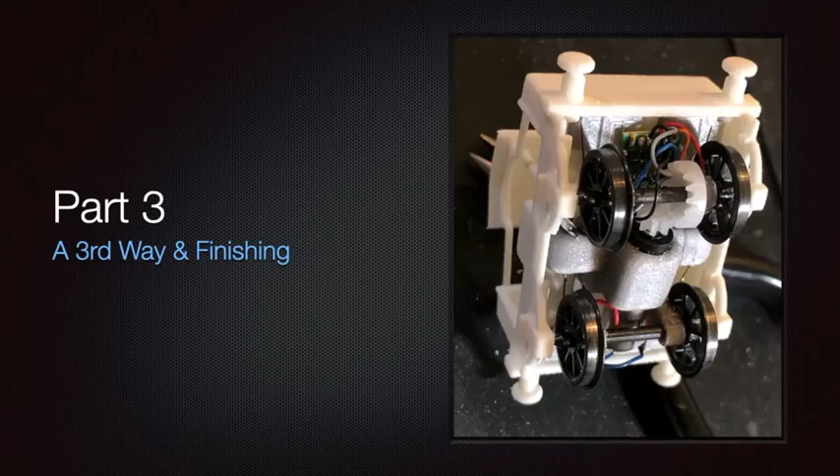Hello and welcome back to part 3 of this video series on 3D printing. In this part we'll be completing our model.

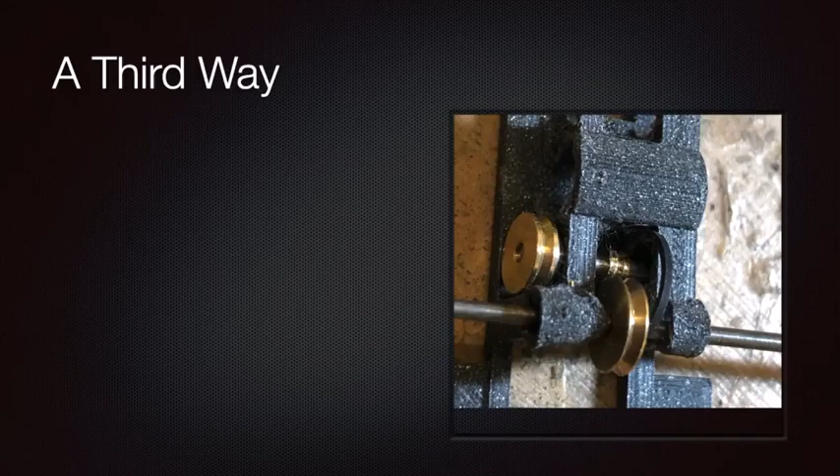I had printed the design that we've talked about in earlier parts and was starting to assemble the final product, as you can see in the illustration on the right. However, I soon realised that I had not allowed enough space around the pulleys, both for fitting the drive belts and also for allowing for the thickness of the pulleys.

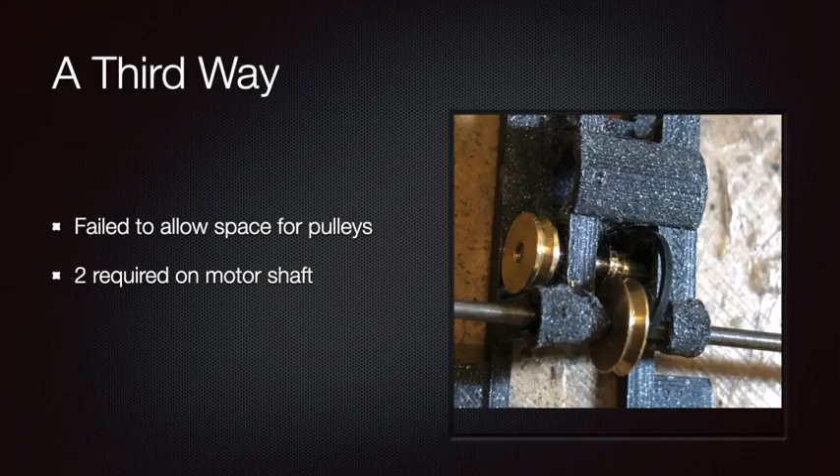The other problem I had was that the motor required 2 pulleys on the end shaft, one for each direction, and the belts had to leave these pulleys perpendicular to the shaft, otherwise they wouldn't stay on the pulleys correctly. Therefore I had to move the motor outwards in order to fit both in between the back-to-backs of the wheels on the Simplex.

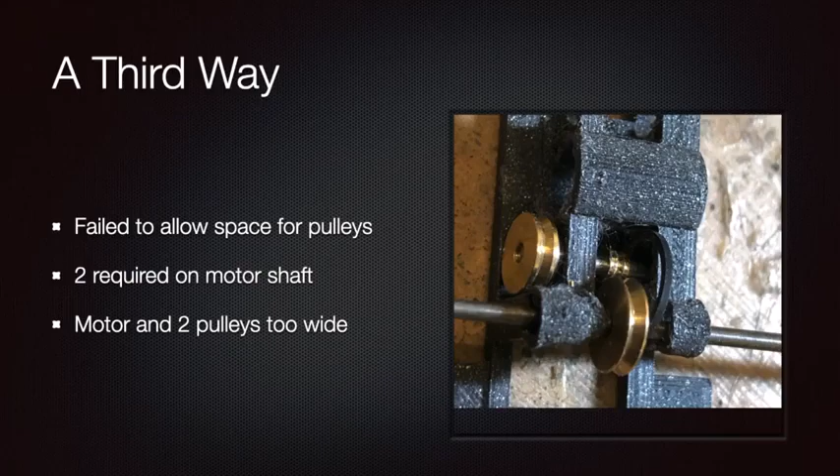This made it too wide and the motor would protrude through the wheels, and this wasn't something I wanted. It would be too visible. Therefore I decided I would look for another way of motorizing the Simplex.

So this new approach I used took advantage of a small motor that I already had, another 6mm diameter motor, only this time it has a planetary gearbox attached to it, which gives quite a high reduction ratio.

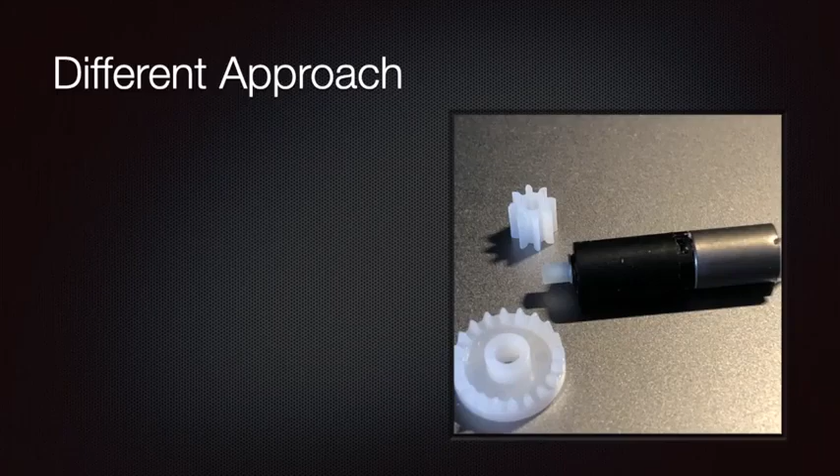I also found a spur gear and a crown gear which would mesh together, the spur gear fitting nicely on the end of the motor, and the crown gear fitting on the 2mm axle of the wheel set of the Simplex.

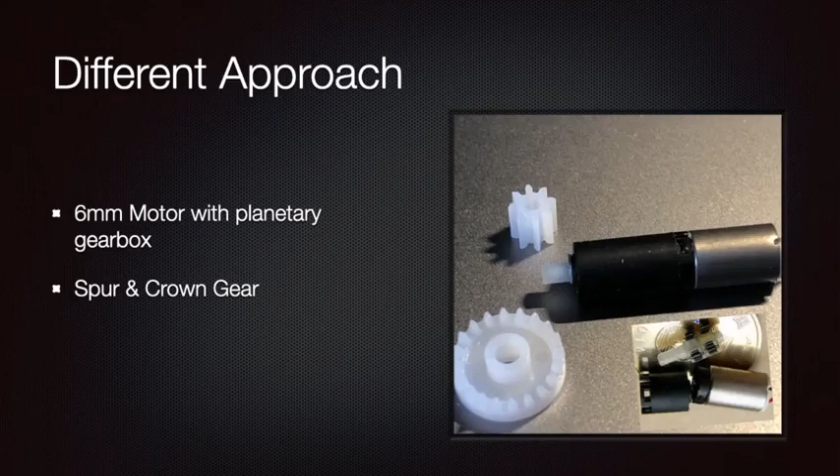I decided I would therefore try and make a design based on using this motor instead of using the pulleys. It did have one disadvantage in that it would give me 2-wheel drive. This motor is quite long and there wasn't enough space to fit 2 of them underneath the chassis of the Simplex.

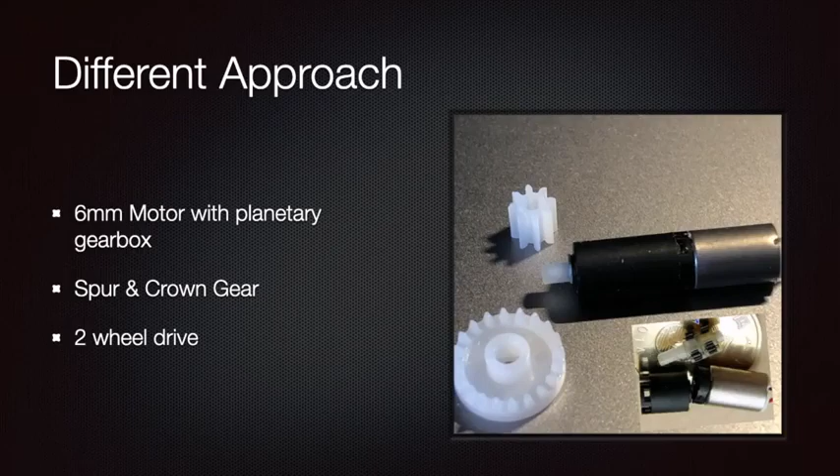So I went back to the drawing board. Well, actually no, I didn't go completely back to the drawing board.

What I did was I took my existing design, the one that was using pulleys, and I used the feature of Fusion that allows you to remove material from a design to get rid of that portion I no longer needed. So what I did was draw a rectangle around the center section, which previously held the motor mount and the 2 mounts for the bearings that were used by the intermediate axles.

Finished that sketch and then extruded it straight through with a cut operation to remove that material, and I was left with the basic frame, so the base and the uprights that would be supporting the axles.

Of course, when it's turned the right way up, the base would be the top and the uprights would be the supports going downwards where the axles get mounted.

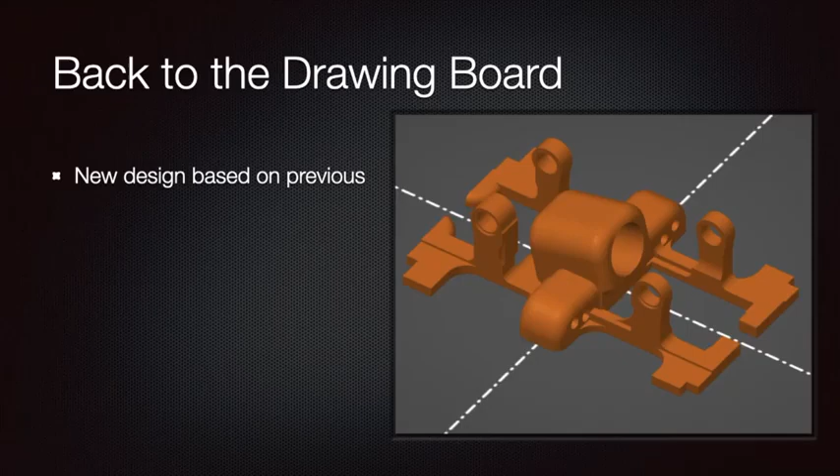What I needed to do was to create an angled mount for the motor. Now, the reason for this was the motor was too long to fit between the axles, therefore it had to be angled so that it went underneath the non-driven axle, but would still mesh correctly with the driven axle.

It's very important with these gears that the motor shaft is perpendicular to the axle it's driving, and that if you take a line through the center of the motor, it passes through the center of the axle. That way the crown gear and the spur gear will correctly mesh. So this was a crucial dimension and angle required in this design.

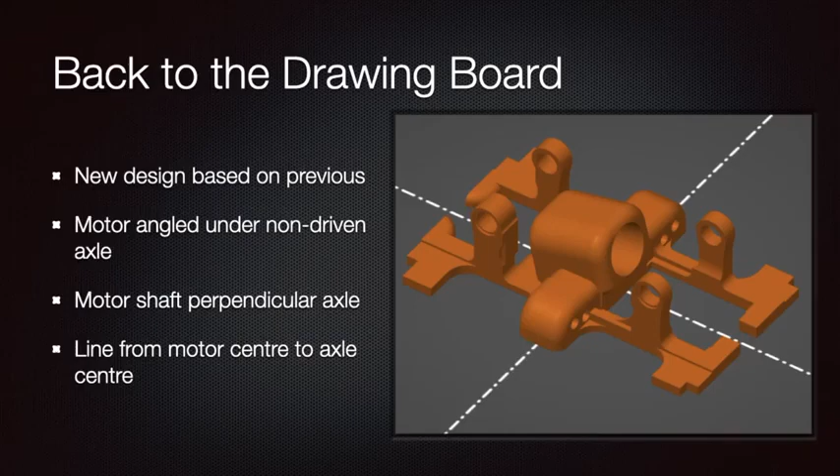So the question was, how was I going to get this right? The motor alignment was actually not that difficult to do in the end, but took advantage of the features of Fusion. I'm going to briefly show you how I did this by using the facility of Fusion to go back along its timeline and show the steps that were done to create the design.

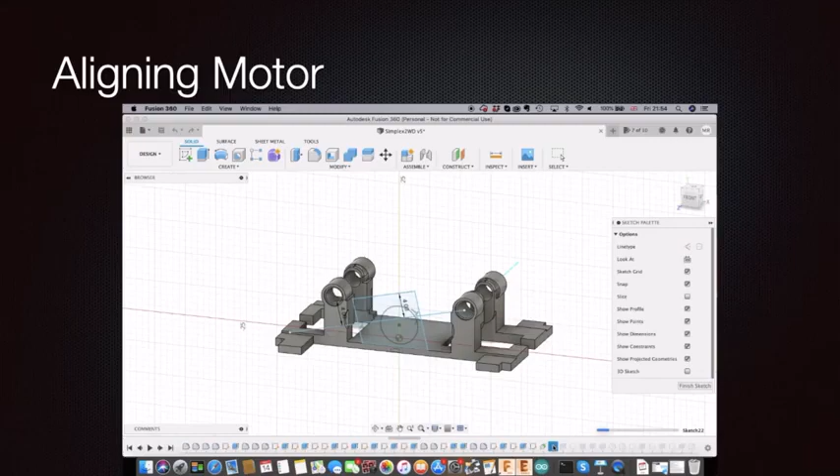What I did was I drew a line from the center of the axle, that's the driven axle, back under the non-driven axle, the length of this line being the length of the motor with allowance for the crown gear and the spur gear.

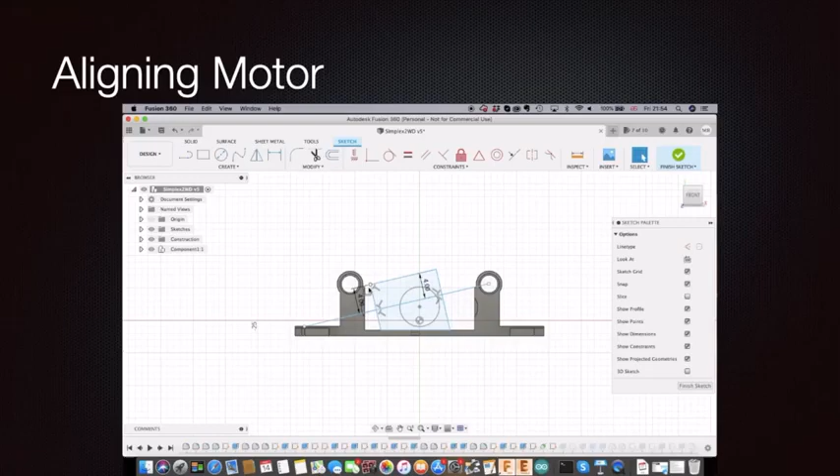I then drew this line at 4mm, perpendicular to the line that came through the center. I drew another one at the rear and created a rectangle, and underneath that I created a trapezium. The reason for the 4mm dimension was because I had a 3mm radius motor, i.e. 6mm diameter. I finished that and then extruded it so I had a block in the center.

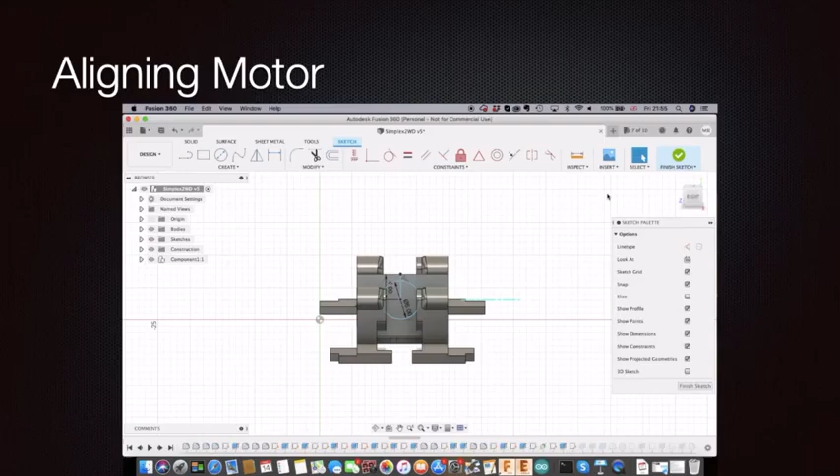The front face of that block is now at right angles to the direction I want the motor to be in. So I drew a line 4mm down to find the centre of the motor, and then a circle of 6mm diameter. When I extruded that through the block, I had a hole at the right angle to take the motor and allow the gears to mesh correctly.

I also added a few other features, like these little side pods you see here with some holes in them, to allow wires to pass from one side of the motor to the other, and also to house some pickups.

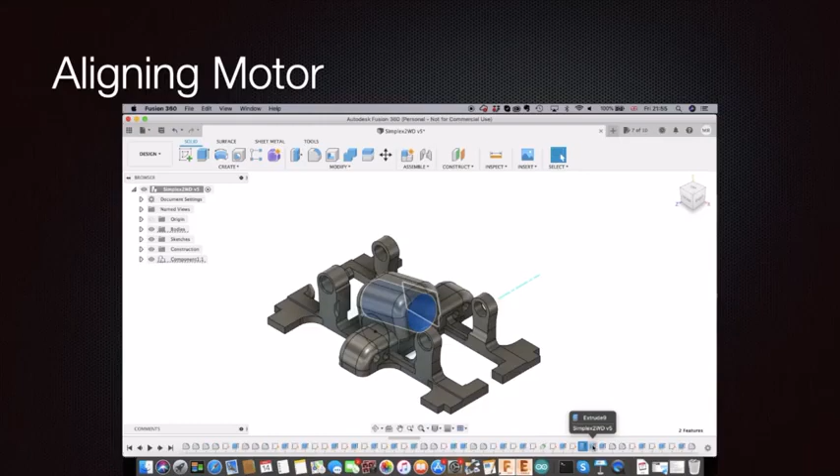This gave me a very accurate angle for my motor, and would hopefully mean that everything would mesh correctly when I started to assemble the chassis.

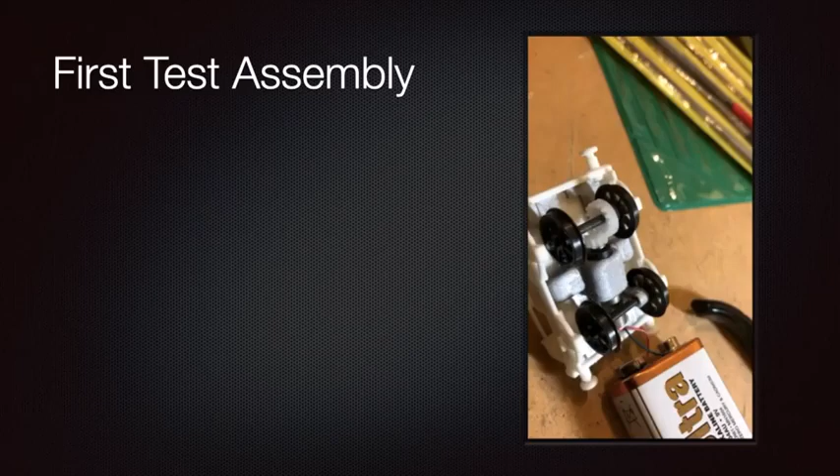So my next step, after having printed this new design, was to add the bearings, which were used for the wheel sets, insert the motor, and add the crown gear.

You can see I've cut down slightly the spur gear because it was very long and meant the motor would have protruded too far to the rear, so it was easy enough to just chop that down a little bit.

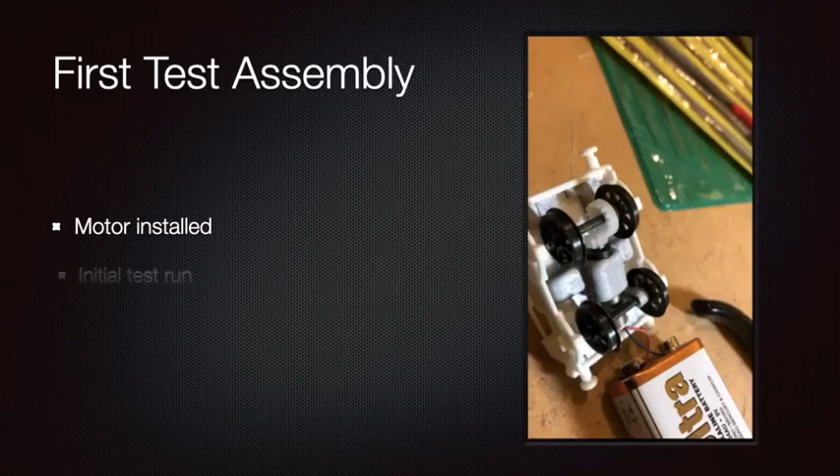So I then did an initial test run with a 9-volt battery, and as you can see the gears are meshed very well and the wheels are turning.

The non-driven set here are rotating just through the vibration rather than anything else. They're not actually driven at all.

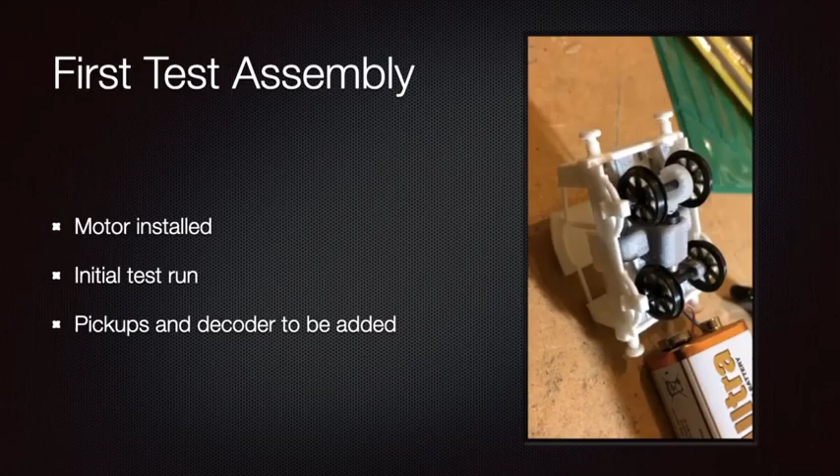So then the next step was really to add the pickups and decoder and see how it would run. One thing with this setup is the motor was actually a 3-volt motor and the battery was a 9-volt battery, so it was driven much faster than it should be and was quite noisy as a result. But I had a way around this, as we'll see later.

And now we get to put all the bits together and do the first test run of our Simplex. I fitted the pickups. These run in brass tubes that go through the holes in those side pods that we saw earlier.

Inside these thin brass tubes is some beryllium wire which actually acts upon the wheels themselves.

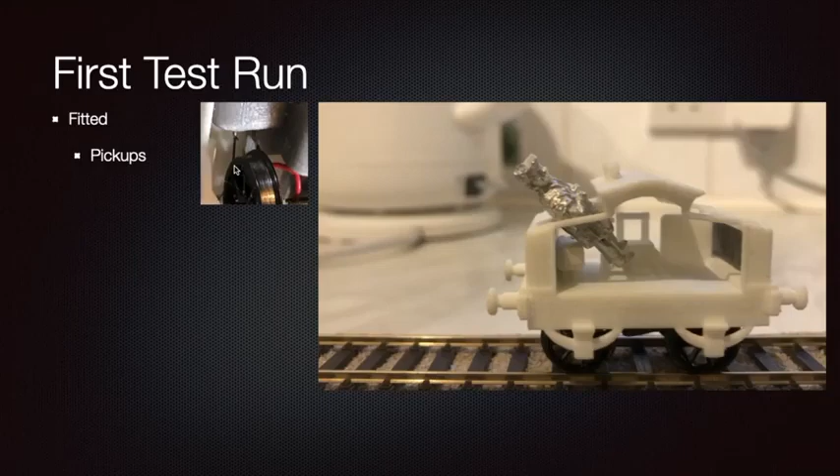I've also fitted the DCC decoder, and this fits in a pocket that will be above the gear set. This pocket was specially made to fit a particular decoder.

The wires from the decoder to the pickups can be seen here where they're soldered onto the brass tubes that go through those holes, and the wires to the motor go through the other holes in these side pods and connect to the far end of the motor.

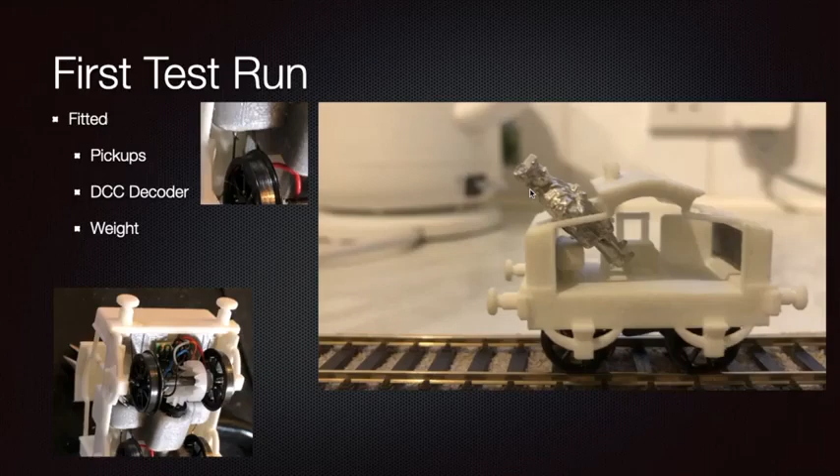I've also added some weight. As you can see in this picture, there's some lead I put in at one end here and also on this end here. I've also put in a representation of a white metal driver. I couldn't find a seated white metal driver at the time, so I've used this standing figure as a stand-in for this test.

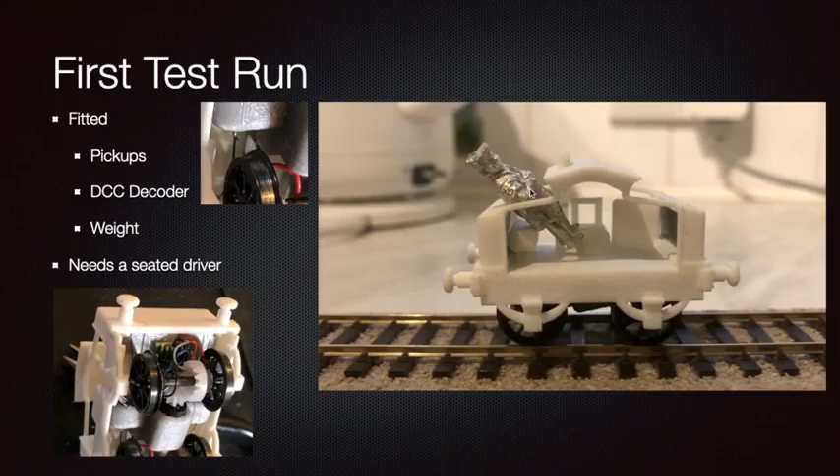I think I might need to add some more weight, but as you can see, it does run, and runs fairly well, quite slowly and smoothly.

I've used CV57 of this decoder, it's actually a Zimo decoder, to set the reference voltage of the motor down to 3 volts. This has helped considerably with the screaming noise we heard during the initial test run with the 9-volt battery, and also with the top speed, so it now runs much more slowly and in a much more controllable way.

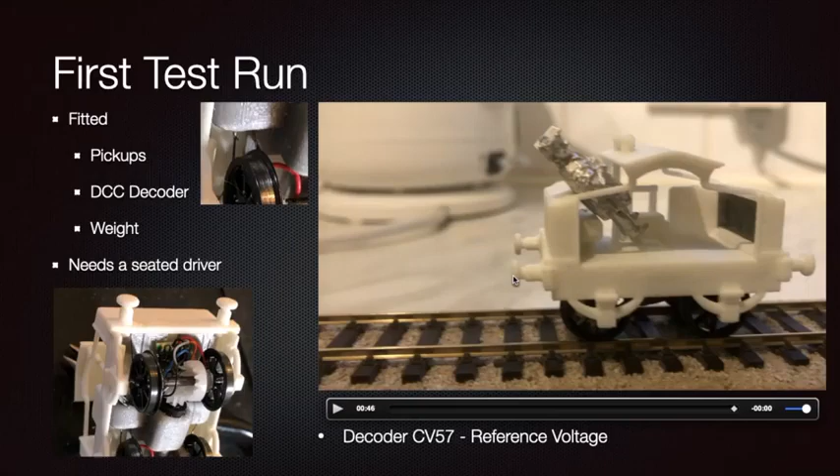You can also note there is not very much of the 3D printed chassis that's actually visible underneath here - just a small amount where the motor mount goes. But all in all, I was fairly happy with this test run. I think I'll still add some more weight, possibly replacing these buffers with some brass turned ones.

So what were the advantages and disadvantages of choosing 3D printing for this project, and was it a good thing to do?

One real advantage of 3D printing is rapid prototyping. Pretty much as fast as you can draw something, you can get the printer to print it. It takes maybe half an hour to print one of these chassis, slightly less I think. But it's fairly quick, and it's a lot quicker than it would be if I was trying to make this out of etched brass, for instance, where I'd have to send away to etchers, or trying to scratch build it.

It also means you can do incremental improvements. I obviously did one big change when I moved from the pulley system to the planetary gearbox system, where I took out the whole centre and replaced it completely, but along the way I've done other incremental changes, such as adding reinforcings, adding these side pods, extending things, putting in the holes for the pickups, etc. All of those things can be very easily done, and it's then just a case of printing another one and you've got what you need. Whereas if you had scratch built it, you would probably have to start again to do some of these things because they wouldn't be easy to add on.

The other big advantage is the precision you get. I ended up with a square chassis very quickly because of the way I drew it in the CAD package - it guaranteed things were going to be square, and when I printed it they stayed square. Likewise, the angle of the motor to get the gear meshing correct was fairly easily done using the CAD package, but it would have probably taken some trial and error if I'd done it in more traditional methods.

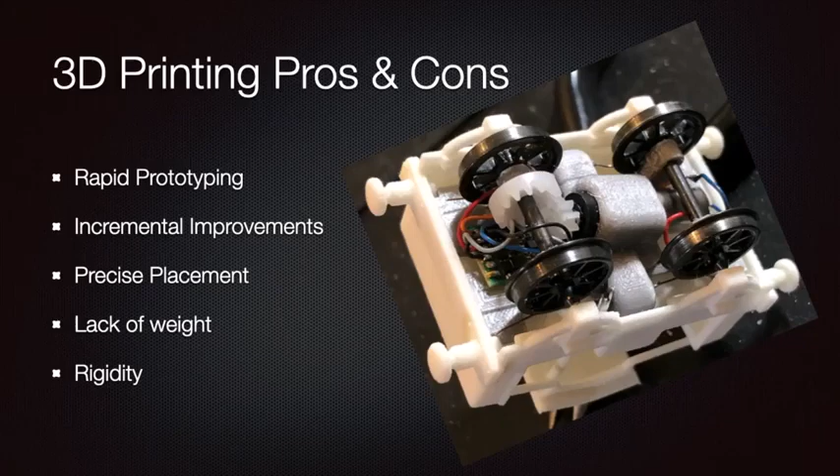All in all, I suspect by using 3D printing I've produced something more quickly and more neatly than I probably would have managed if I'd been scratch building this out of brass section, for example.

Well, thank you for your interest, and hopefully this has given some insight into what's possible using 3D printing. By no means is this sort of project the only thing you can undertake, but it's certainly something that is quite feasibly done with a home FDM printer. There are lots of other things that can be done, and that's very much up to your imagination. Once again, thank you for watching, and I hope you enjoyed it.